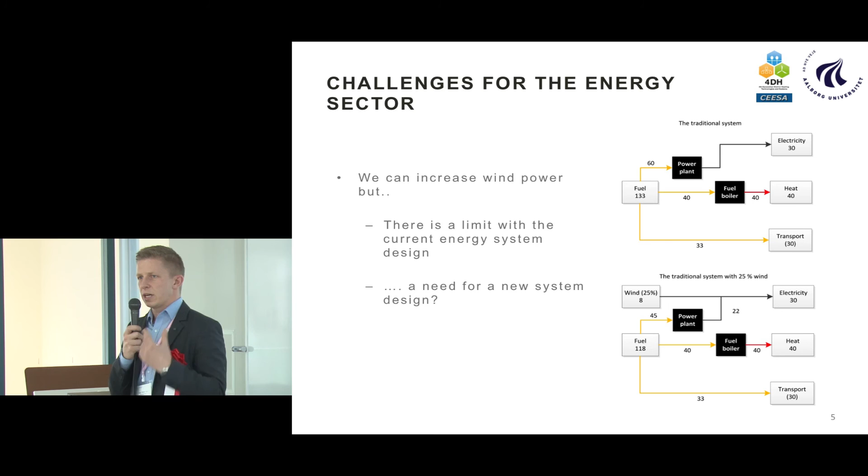Now, what a lot of the talks has been about is the electricity sector. If we focus on the electricity sector, we will not be able to redesign the system. We need to focus on the heating sector, we need to focus on the transport sector, and by doing so, we are actually able to cost effectively come a much further way.

We have a lot of state-of-the-art knowledge about how we can go to 100% renewable in the Danish context. So I will go through some of the results that we have done. Of course, there are quite a lot of barriers, not the least public regulation barriers and how to design markets and subsidies. But there are also a lot of technologies that are already ready.

If we condense down into very, very short what kind of strategies we need to have a redesign of the system, we can divide them into 3 segments. First of all, as you all know, we need to do energy savings. Now, 1 kilowatt hour in the electricity sector that we're not using is extremely feasible and extremely low cost. So we need to redesign the appliances, and we need to focus on energy savings in the electricity sector.

If we move on to the industrial sector, there's a lot of low-hanging fruits that can be implemented. But more complicated, maybe buildings. Now, buildings, at least in the European Union, are using about half of the energy that we are using in the EU, and there's a lot of lack of focus on this sector, in my opinion. And one of the things that we have tried to focus on is what are the balances between refurbishment of houses, insulating houses, and the production side. So you need to have a balance between how do we supply heat and how do we refurbish our buildings. So I'll come back to a study on that on the European level.

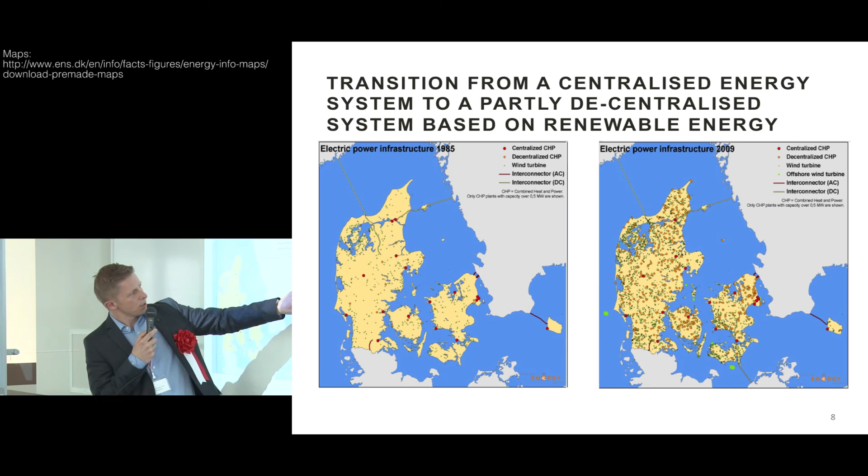When we move to this side of the slide, we see 2009. And in 2009, we have a lot more things going on. All of the yellow little dots around are combined heat and power plants in cities down to 200 inhabitants. Most of them are between 10,000 and 100,000 inhabitants. And also what we see is a very large amount of wind turbines dispersed. You can't see it from the distance, but they're also on the picture.

But what does this mean? Well, this means that in this system here, we had a lot of power plants producing a lot of power, but wasting a lot of heat. In this system here, we have a lot of power plants dispersed around the country, producing a lot of heat, and also using the heat locally. This is one of the fundamental changes in the system design that needs to take place if we want a cost-effective, cost-optimal system, because if we don't redistribute how power plants are built, combined heat and power is not able to take place, and we will simply waste heat up in the air, which will then have to be supplied by boilers.

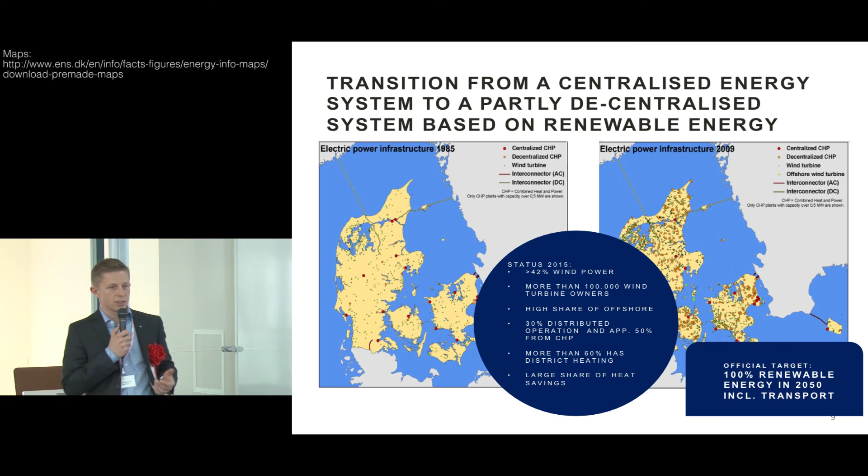Now, some of the results currently are that we have more than 42% of wind power in the Danish grid. Actually, if you go to the western Danish part here, which is a TSO system on its own, we have more than 55% of wind power managed in that system. In Denmark, we have more than 100,000 wind turbine owners out of a population of 5.5 million. We have a very, very high share of offshore wind power, around 1,300 megawatts offshore installed.

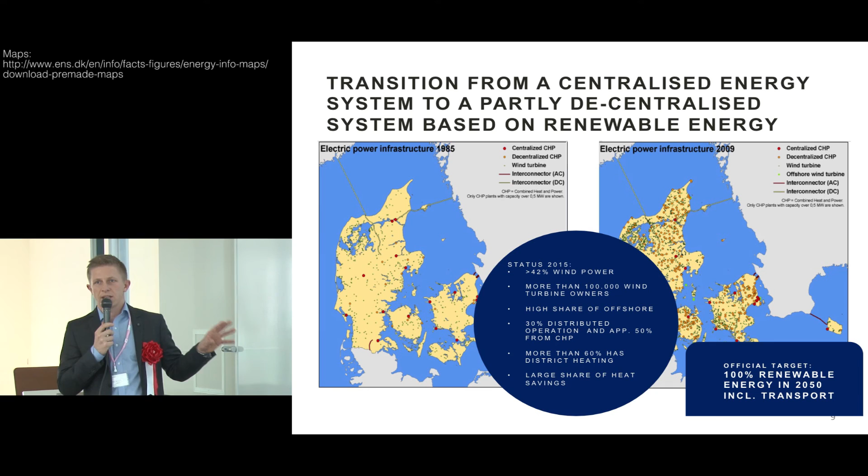30% of the electricity production is distributed, and 50% is from combined heat and power. Around 60% of the heating supply is district heating. And what you don't see on the picture is heat savings. One of the first things that were done were heat savings, and that's of course extremely important.

I think many of the situations that Denmark has been in are similar to Japan in respect to some of the challenges that triggered the transition. Our transition was triggered in the 70s when we had the oil crisis, and Danish prime ministers were traveling down to the Middle East to make agreements about oil prices for Denmark, and we had Sundays where we couldn't drive cars. So government quickly realized we have to do something about this. We were 100% dependent on oil, and the prices were fluctuating up and down.

We did not start doing this because of climate change. We did it because we had a deficit on the balance of payment, because we had large unemployment, and because businesses could not survive in a situation where oil prices were fluctuating up and down month after month. So we now have a very low cost system, an efficient system, a high security of supply, and low CO2 emissions.

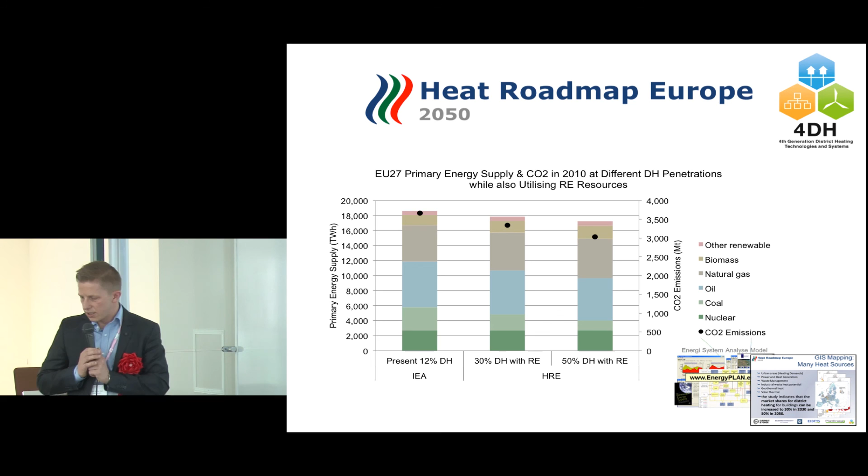We did a very large study on it, and the results were that just having very simply implemented this, we were able to have 7% lower fuel consumption overall, not even introducing a lot of energy savings. This is not the 35% energy savings level, this is just introducing district heating. We were able to have 13% lower fossil fuels, 17% lower CO2 emissions, have room for more renewables, and also show that there are more jobs in this kind of system.

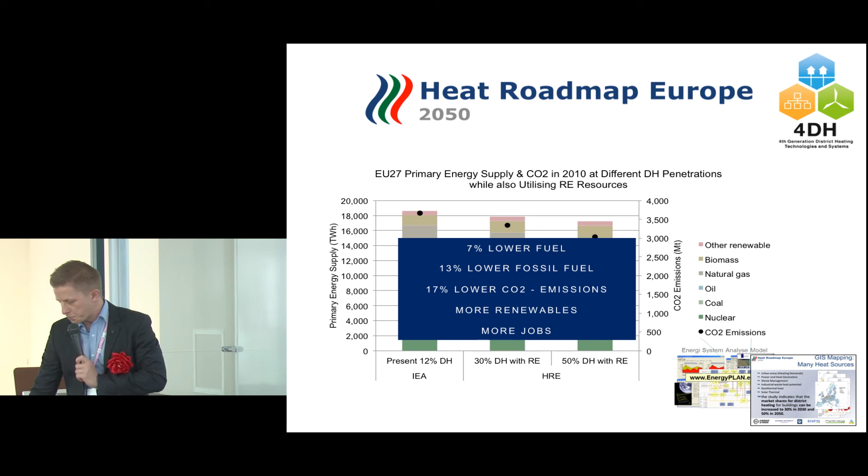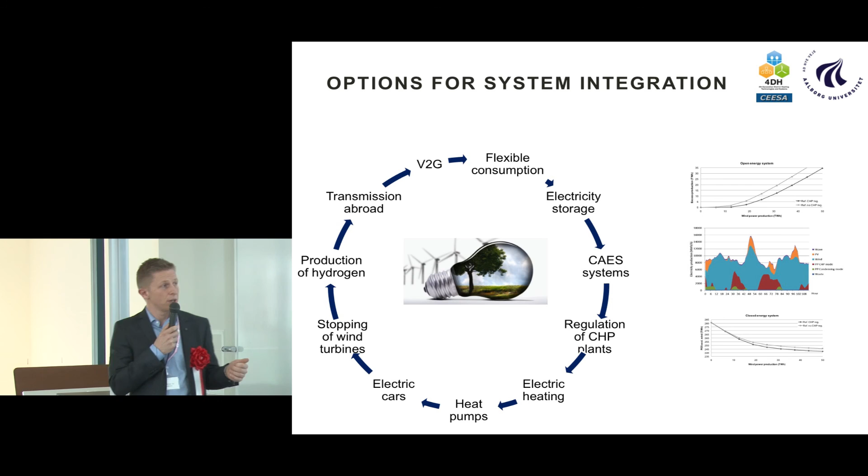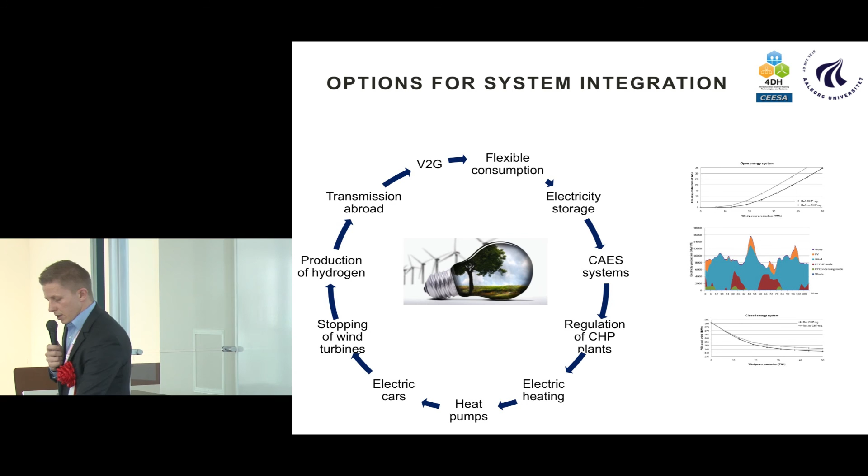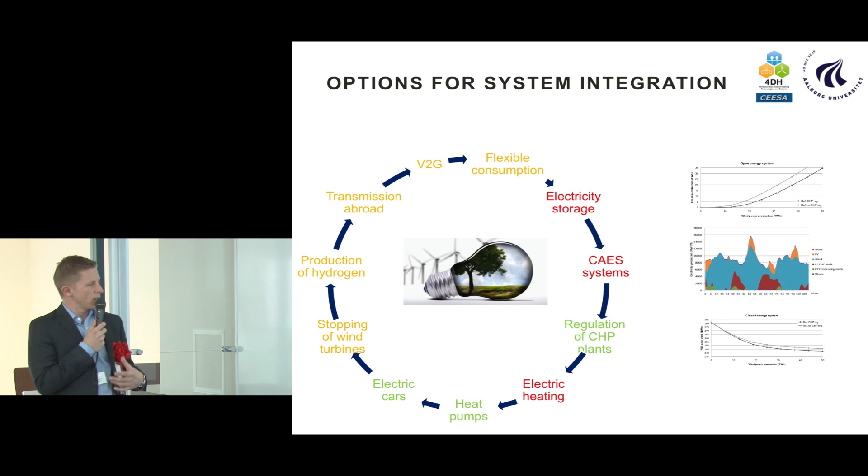In the future, we need to move on from the heat sector, which means that we need to look at the energy storage options we have available. We have done quite a number of studies about what technologies are able to integrate renewables. We have looked at vehicle-to-grid, flexible consumption, electricity storage, stopping wind turbines, electric vehicles, heat pumps, a number of them. What we see, I won't go through all of them, but what we see is that using electricity storage is something we should not do. Using thermal storages, using gas storages is something that is much more efficient and where we can create a lot more flexibility in the future.

Now this tells us that we need to focus on other kind of storages than electricity. We need electric vehicles, yes, but we don't need to store electricity in batteries to put it on the grid again.

What we find is that we need to have a much more integrated approach, and we call it a smart energy system. The smart grid often leads to focus on transmission lines and electricity storage. What we need is to look at heating and gas and transportation, which represents much cheaper options for integration. So we need to have power to heat, power to gas, power to transport as options for the future that are much more cost effective.

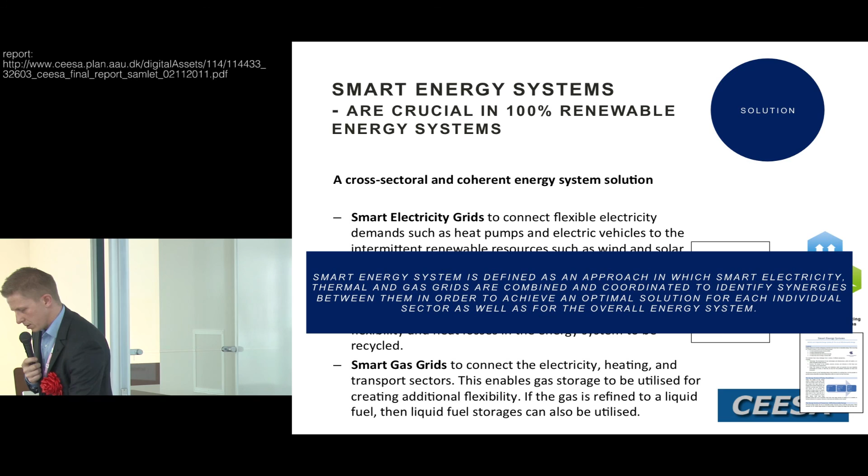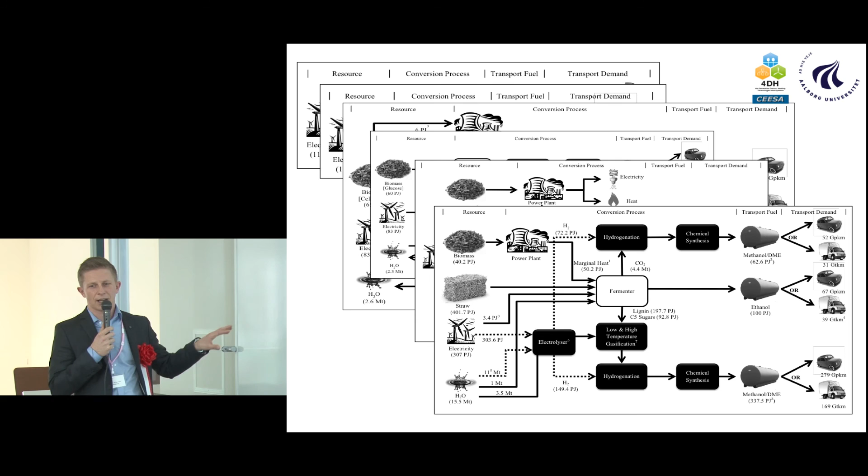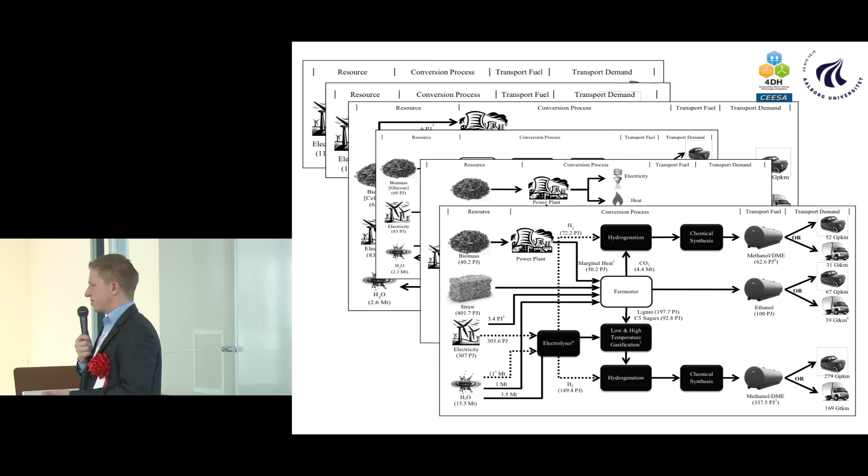The transport sector is a really big problem now. I include this slide just to show you how many complicated biofuel ideas are out there. I believe we need to have a lot of electric vehicles in the personal transport, but we do have a number of challenges. We have the trucks, we have the ships, we have the aviation, and if we use second generation biofuels to supply those transport demands, there will not be a drop of biomass left for anything else, not least mentioning food production, medical appliances, other kind of issues that need to be covered in the future.

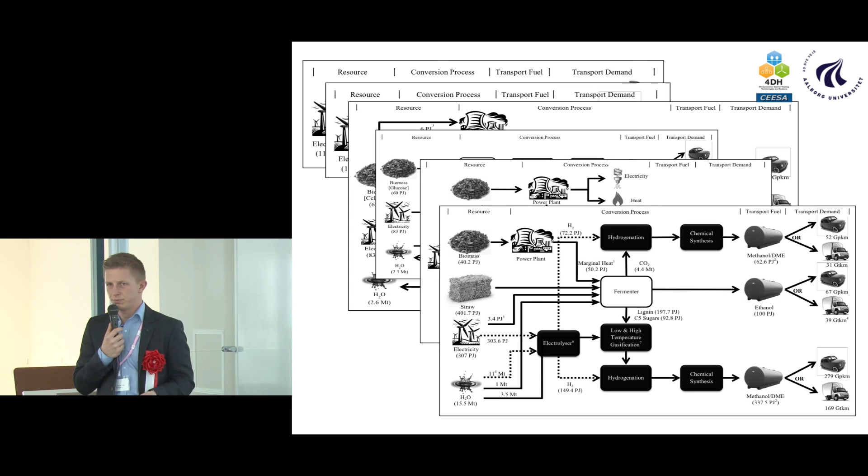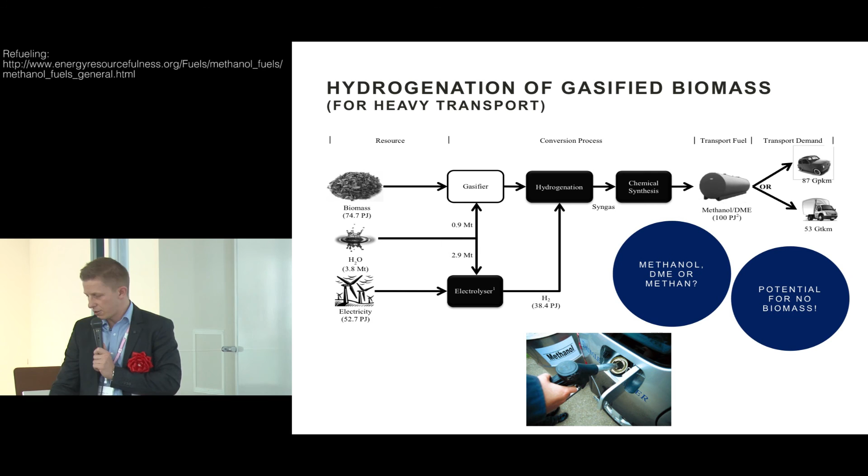So if you have carbon capture and storage, you can replace the biomass, use the hydrogen down here to produce this methanol. And you can even use this as a carbon sink. So instead of having CCS on a biomass power plant, you can use this to store carbon if you need to have negative carbon emissions. I have not assessed that. That is something I mentioned because it was discussed earlier.